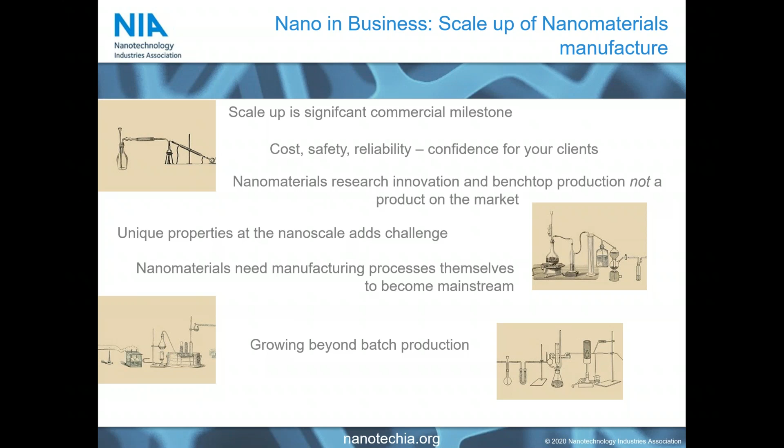And a lot of our members, where they're looking at early stage development, you're looking at small scale batch production, which is great for working with in the lab, but that is not how you're going to produce large quantities of it on a reliable, regular basis. So it's really about how you create the regular and reliable creation of larger scale amounts of your material. And this is really what our two speakers are going to speak about today.

I'm extremely pleased to have our first speaker as Promethean Particles, which is an SME based in the UK that, based on its own technology platform, has now become a successful scale-up manufacturer of materials, working with clients from all around the world in all different sectors. So they bring a very interesting perspective to how they see scale-up needs and how they address those needs.

We will then move to the absolute opposite of the spectrum and go to a large international company, which is Corning, which is, as you can see, almost 170 years old and a truly worldwide company. And its contribution to nanomaterials manufacture is based on its long history in glass and ceramics. So they've come into nanomaterials production from a very different perspective.

So what I'm going to do now is hand over to Selina, who will be our first presenter. So you will have to bear with me because I've got to find Selina out of our huge list of people that are taking part today. And she's S, so she's really far down the list. But Selina, perhaps you could introduce yourself and, oh, Sean's already done it. That's great. That's lovely. Thank you very much, Sean. You are much faster than me. So I will put myself on mute and Selina can introduce herself. And thank you very much, Selina, for taking part today.

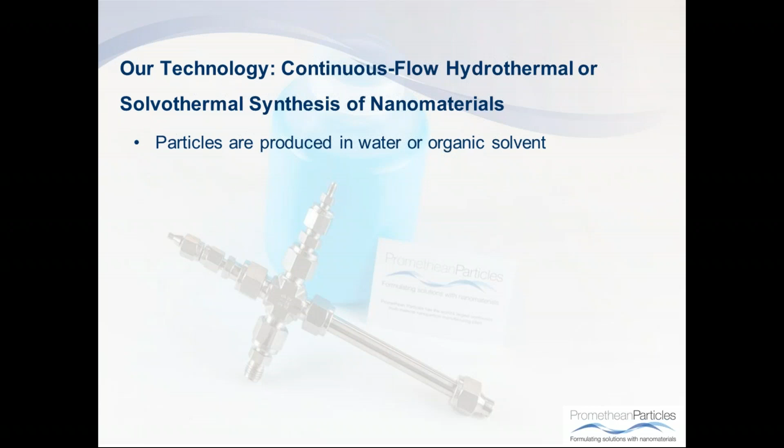So I won't go into too much detail about our technology today, but there's a nice video on our Promethean website which shows an animation of our process, or if you want to contact me afterwards to find out more, then please do so. But in a nutshell, we use a wet chemical process. We're using hydrothermal or solvothermal synthesis to produce our nanomaterials, but most importantly, it's a continuous flow process, not a batch process. So we see several benefits for our technology.

Because it's a wet chemical technique, what's happening there is we have our liquid raw materials pumped into our reactor systems. We then heat the liquid precursors under pressure, and that leads to particle nucleation. We're operating at temperatures up to 400 degrees Celsius and pressures up to 240 bar. But this is all done in a safe manner because we're using thick-walled stainless steel to manage everything.

So after we produce our particles, the product dispersion stream is cooled and depressurized, and our liquid product is collected at the end. And we have control over all the process parameters, such as the temperature, the system pressure, the types of raw materials, and the concentrations we're using, as well as the solvents or the flow rates. So there's a high degree of versatility and flexibility within the process.

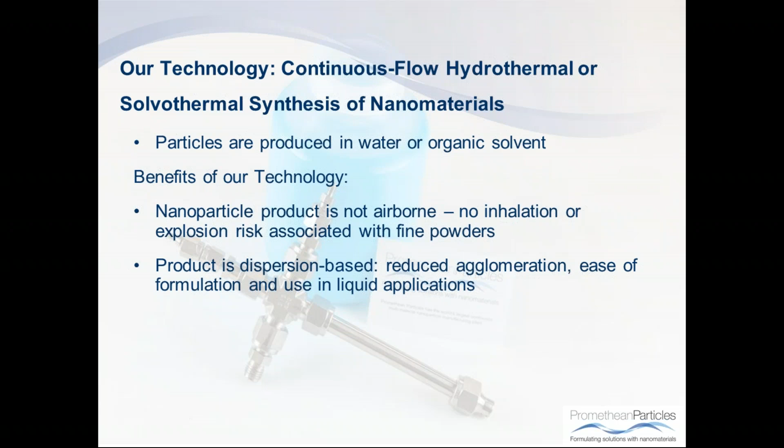But because it's a wet chemical process, there are several benefits, from health and safety benefits, that we're not handling dry powders, particularly pertinent when it comes to nanomaterials. But also from a technical point of view, using a solvent-based technique can have its benefits in terms of reducing agglomeration or protecting the particles against oxidation from the environment and that sort of thing.

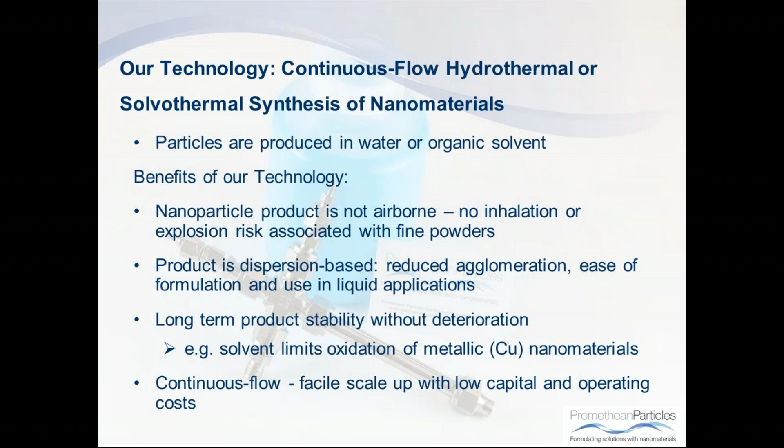And then because it's a continuous flow process, scale up is arguably simpler than scaling up a batch technique. Then from a cost point of view as well, the operating costs are relatively low compared to batch techniques. So at Promethean, we have bench scale reactors that we use mainly for rapid prototyping rather than production. These are producing a dry weight equivalent of a couple of grams per hour. So these systems are used to optimize the product for R&D purposes.

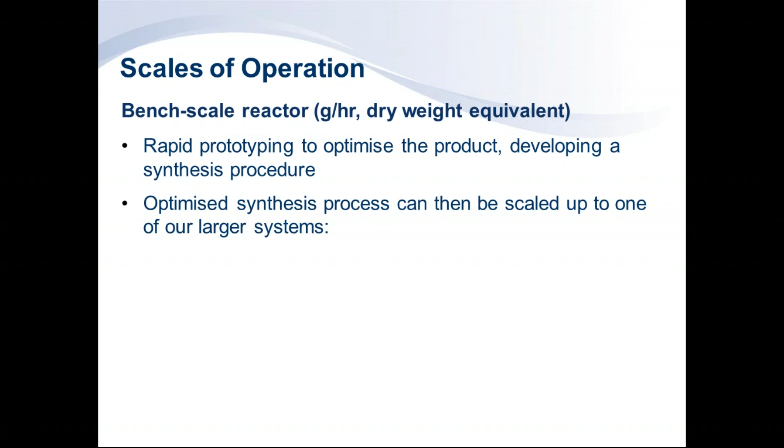And then once we've optimized that synthesis process to get the material that we want, we can then scale it up to one of our pilot scale systems. These have the capacity to produce anywhere from 1 to 10 tons per year, dry weight equivalent. And so these are used for production as well as to demonstrate scale up from bench scale. In the design of these reactor systems, there was a lot of modeling and CFD, computational fluid dynamics studies, that went into studying the fluid mixing within the system to make sure that the pipe diameters we were using were scaled up appropriately to maintain that homogeneous turbulent mixing in the system.

But like the bench scale systems, these pilot scale rigs are still fairly flexible in that we can use a range of operating temperatures, a range of pressures and flow rates. So we can use quite a few different processes and make a few different materials on these rigs. To date, we've probably upscaled about 50 different processes from bench to pilot, and we've seen very good reproducibility in terms of particle characteristics. So we're confident that any process we develop at the bench scale can be upscaled to pilot.

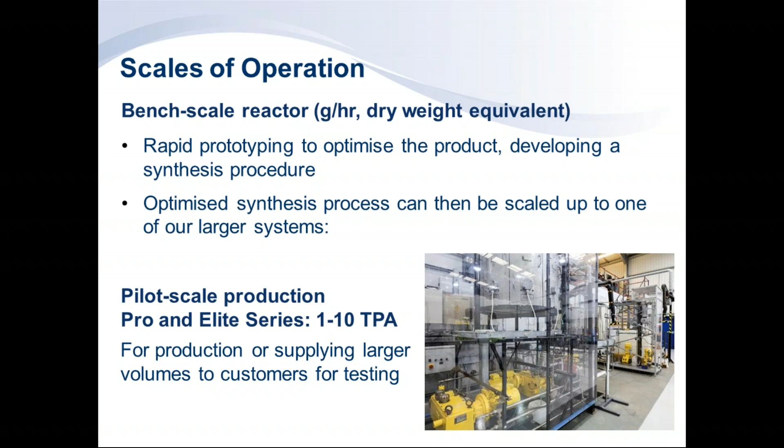And at pilot scale, that's sufficient to meet production demands for some markets, but in others, 10 tons per year isn't sufficient. So for that, we were very fortunate to be part of a European project where we got to design and build this system here, which we're very proud of. We call it our Infinity series, and it's the largest reactor system of its kind in the world. As part of the European project that we worked on called SHYMAN, we collaborated with chemists, chemical and process engineers all across Europe to design and build this system.

So again, there was a lot of modeling and CFD work that went into looking at the fluid mixing within the system and keeping it consistent with upscaling. In addition, with the Infinity series, heat recovery was built into the process to increase the efficiency of the process and also ensure that the sustainability aspect is maintained.

Even at this scale, there's some degree of flexibility in that we can again control the operating temperatures and pressures, so we can produce a lot of different materials using this system. And to date, we've upscaled probably around 7 different processes onto the Infinity series, and again, we've seen very good reproducibility even at this scale.

So we operate it on a campaign basis, producing one material, and then we have a clean down procedure, and then once that's in place, we produce another material. And the beauty with it being a continuous flow process is that if we need to produce a larger volume of a certain material, we can just run it for longer.

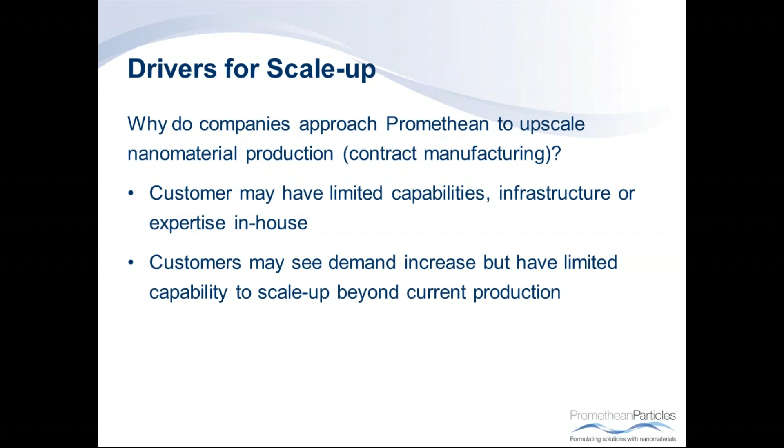And then in some other cases, it comes down to health and safety, actually. So some of our customers may have developed a material using a process that can be exothermic or leads to a pressure buildup. And that can be particularly dangerous, especially if they're using a batch vessel, where the pressure buildup essentially means that they're handling an explosive device. So then that's just not feasible to scale up. So then they're seeking a continuous flow route instead, and that's where our technology can really provide some added value there.

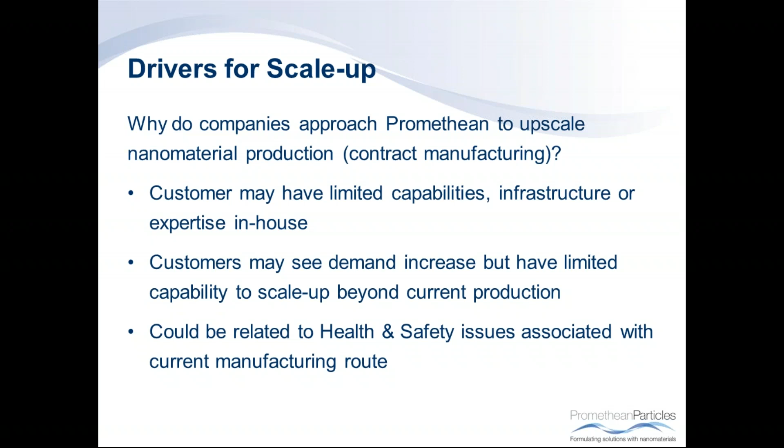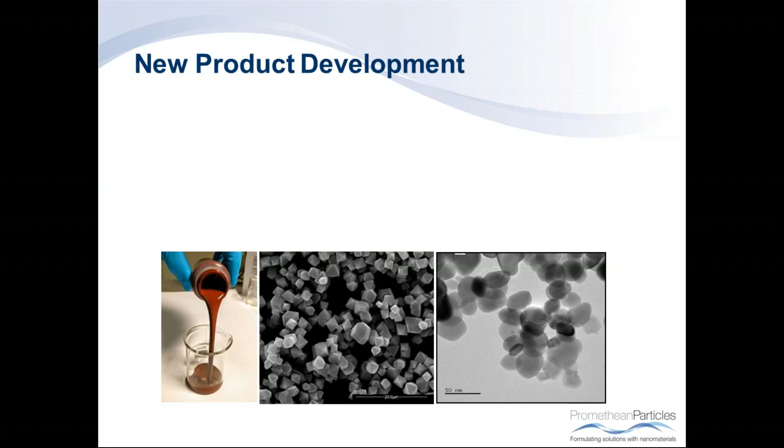So as I mentioned, as well as conducting feasibility studies and scale-up projects for our customers, we have our own product development at Promethean. So I'll talk a little bit about that. So the images here just show some of the products that we've developed and now sell on our web store. So we've got copper on the left. In the middle is a metal organic framework structure, which I'll talk more about a little bit later on. And then on the right there is an iron oxide.

So as we're thinking about new products and developing them, even at the conceptual stage, we have to think about the bigger picture questions. So thinking about the market demand, because as cool as blue sky research can be, as a business, we ultimately have to address a market demand, and our products have to meet a need. So it's identifying that need. And then we also think about our technology. What's the USP? Is it offering something different to what's already on the market? Can we make it cheaper than what's already out there? Can we make a better product? Or is it simply that the supply currently available just doesn't meet the demand?

So those are the drivers for why we develop our own products and go down the upscaling route, because there are plenty of suppliers out there making titanium dioxide for pigments, so there's no point us trying to reinvent the wheel, so to speak.

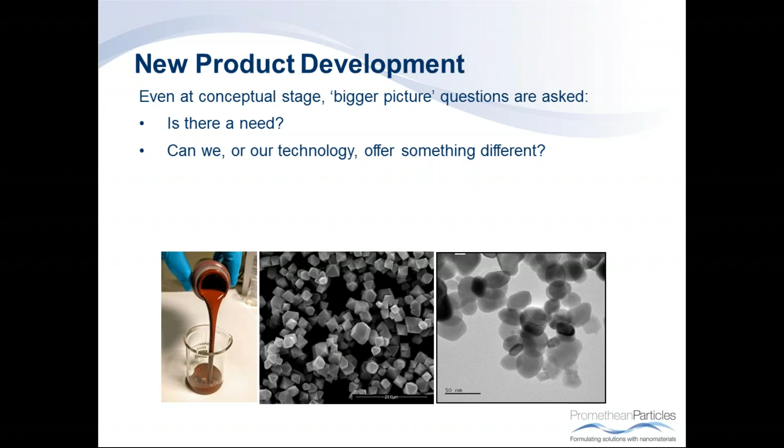Then we also, from the conceptual stage, think about any obvious barriers to scale up. So with some materials, there are very niche, specific raw precursors that are needed to make that product. And it may be difficult to source or expensive to buy in. And that can be a real barrier to upscaling.

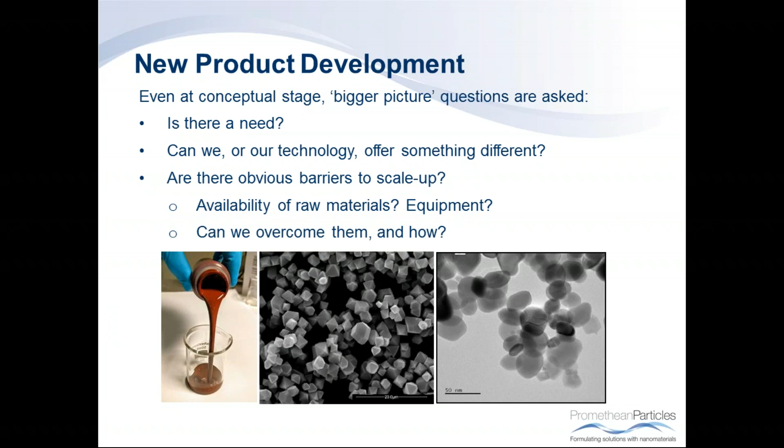And then also if there's any specific equipment that we don't have that's needed for making that material, processing it or purifying it, then that's something we need to consider even from the early stages. But ultimately, if we identify a strong need and we know that we can offer something different to what's on the market there and disrupt the market, then we ask ourselves, how can we overcome these barriers? And that's part of the innovative streak within Promethean.

So with the products that we've prototyped at the lab scale, and then we're thinking about upscaling to the pilot scale, there are several technical and commercial considerations that we have to factor in. And I've put the technical and commercial considerations together because often they go hand in hand, even sometimes if you don't realize it. But the important thing is that all these factors need to be reviewed regularly during the upscaling process because things can change both internally and externally.

So for us, when we've prototyped at the lab scale, we need to define a specification. So what are the key material characteristics that will be a marker for success? It's not always particle size. It may be a bit of a red herring there, and it may be that your purity or your size distribution is the key thing there.

So it's understanding where the goalposts are and what the target is, because ultimately when you've upscaled the material, yes, certain parameters can change, but are the key parameters still the same? Because that's how we can identify success. And then that will feed into the quality control procedure for that material, not just the QC for the end product, but also QC for incoming raw materials and inline QC as we're producing the material in a continuous manner.

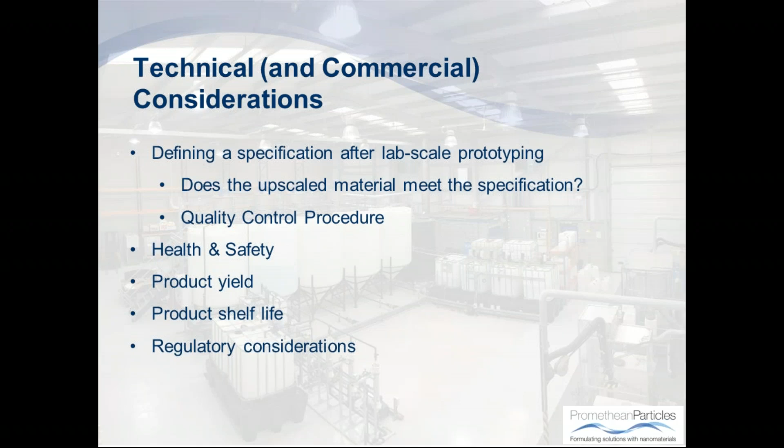For us, because we're contract manufacturing materials for our customers, after production, we need to think about shipping. So if it's hazardous goods, then there are certain regulatory things we need to think about, like packaging and also all the paperwork that the couriers need.

And then, of course, money comes into it. So we need to think about the cost analysis and the scale of operation. Because we're using a continuous flow process, economies of scale plays a very, very important role. Essentially, the more we make, the cheaper it is per unit. So the cost per kilogram of material decreases with the increasing scale. So we need to identify this scale of operation where it becomes cost viable, and also how that balances with demand.

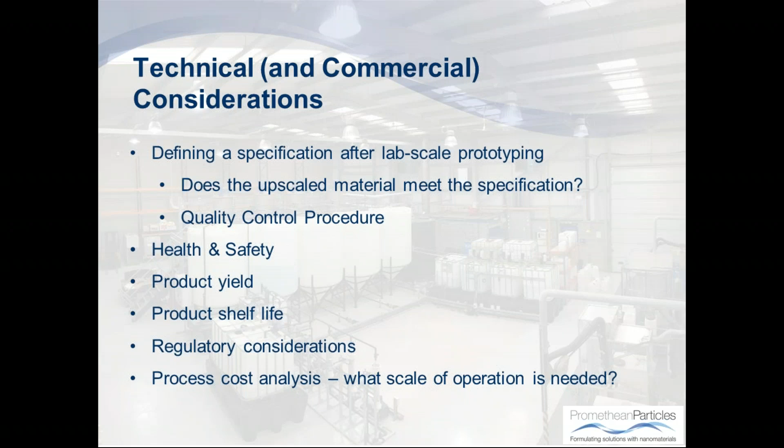So I've got a couple of slides here with an example of one of the products we've developed in the lab and then upscaled, so the metal organic frameworks. So MOFs are a group of compounds that are highly porous and have a very high specific surface area. So they're useful for hydrogen storage, carbon capture, as well as catalysis and chemical separation as well. So this material here is called ZIF-8, and we identified a demand and a unique selling point where our technology could offer something that wasn't available on the market, in that we could actually reach greater scales of production than currently being offered.

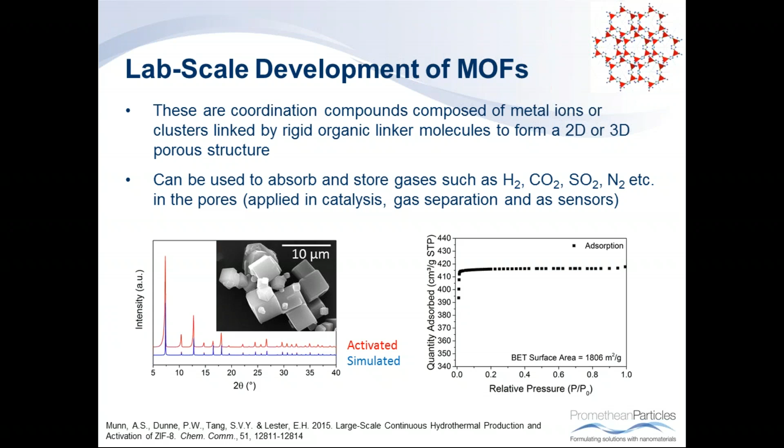So we prototyped the process at the lab, developed a procedure for manufacturing this material at a small scale, and we got the crystal structure that we needed and the surface area that was in line with what was reported in the literature. So then we started looking at scaling this up to pilot scale. So at this level, we were producing up to about 1 kilogram per hour dry weight equivalent. And with this material, the crystal structure and the surface area are the two key characteristics. So that starts to form our spec.

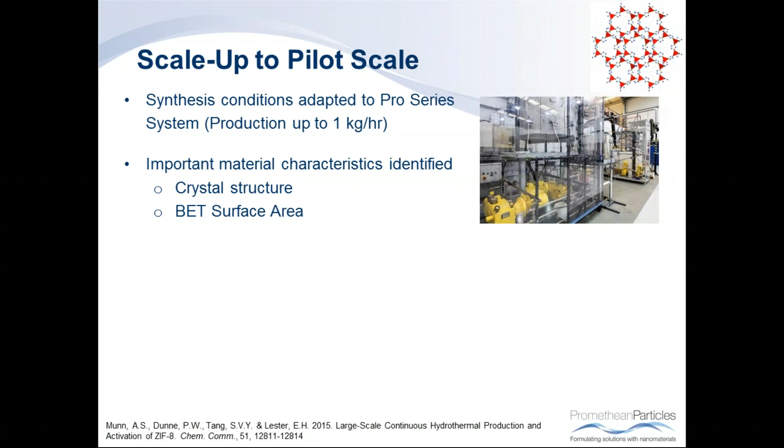As we produced it on the pilot system, the crystal structure was spot on, the surface area was in the right ballpark, but the particle size and the morphology was slightly different. So this is what I mean about understanding your spec, because different isn't necessarily bad. In this case, it doesn't affect the end performance because the surface area is still in the range it needs to be. So in this case, we can consider this scale-up process a success.

As importantly, the economics of the system is sufficient in that the costs of producing at this scale are low enough that we can offer this product on the market for sale at 1/10 of the price of other suppliers currently in the market. So there's this balance between the technical priorities and commercial priorities there.

And then even with getting this product on the market and achieving scale-up, we're still looking at improving the product more. So since this publication, we've been able to increase the BET surface area up to 2,000 meters squared per gram, and also increase the yield to make it even more cost effective.

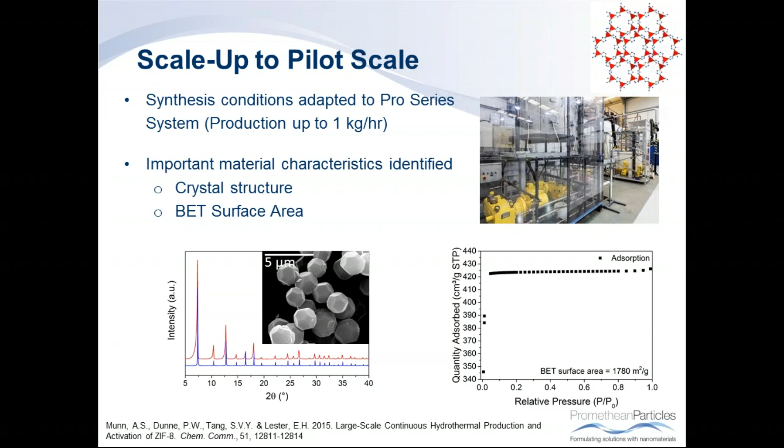So finally, to summarize and conclude, using a continuous flow process to address scale-up can have several benefits. Because we take a just-in-time manufacturing approach, we're producing material and we can have a QC protocol as the material is coming out of the system. So we can very quickly identify if something is not quite right, and then rectify it, which means that we're minimizing the amount of waste. We're not having to discard an entire 1,000-litre batch because something's gone wrong. We can react quite quickly, and that means that the process is an efficient and sustainable one.

And because we can control our process parameters, we can fine-tune conditions and optimize at scale. We're not having to go back to the bench scale and re-optimize and then scale up. We can do it at the pilot scale as we go along. And then the multi-material flexibility means that we can scale up lots of materials using the same equipment, which means that we're minimizing the capital expenditure. We're not having to have separate reactor systems for each material.

And then from a health and safety point of view, compared to batch systems, our continuous flow reactor systems aren't closed vessels. We continually have raw materials coming in, product going out, so it's easier to maintain pressure, not having unexpected pressure buildup or any exothermic reactions, so regulation of the process is a lot easier. And finally, because of the economies of scale, scaling a continuous flow process means that the operating costs or the cost per unit comes right down with increasing scale.

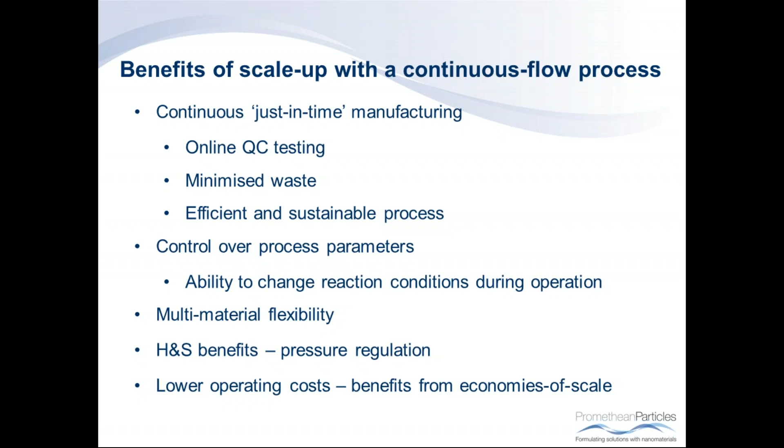And it's very interesting when you said that often the scaled-up particle may actually be slightly different than the original particles developed. And of course, when you look at REACH dossiers, that's a very important factor to take into consideration. So you have to ask the question as to what your dossier is going to contain to ECHA, whether it's the original material you've produced or the scaled-up version of that same material.

So, as you can see, I'm an application engineer working at Corning. And it is my pleasure today to deliver my quick presentation on the Corning Advanced Flow Reactor as part of the Nano in Business Group. My role is to be the technical support for the customers.

Let me guide you quickly through our agenda. After a few words regarding Corning itself and presenting the AFR business, I will show you an example using the equipment and displaying excellent reproducibility on bimetallic nanoparticles. Then I will discuss another example of quantum dot synthesis, showing scalability, and finish with another application on photochemistry before concluding.

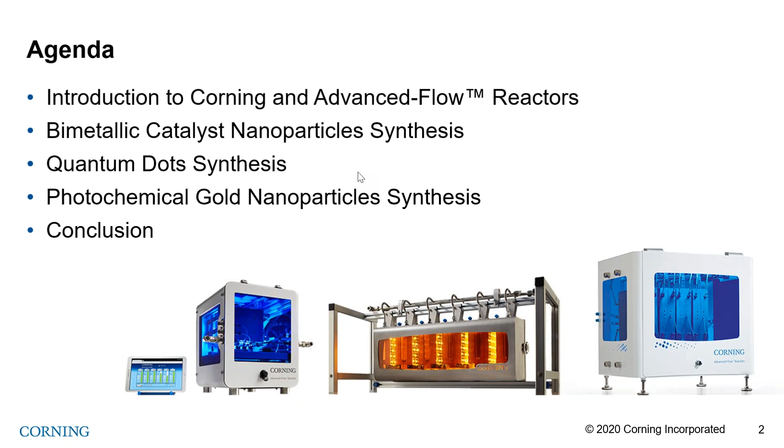So, Corning is an old and well-established world-leading company specialized in glass and ceramics. Its core philosophy is based on innovation and research to change and improve the life of people. It is a global company present worldwide, striving to bring technology everywhere.

Corning is used to produce mass market products which improve people's lives. The core innovation has been present throughout Corning history and is more true now than ever. Corning has been upscaling everything during its whole life. Among the things Corning has developed for the market, one can notice the Pyrex glass, television picture tube, optical fiber, and the Corning Gorilla Glass, which equips millions of mobile phones worldwide.

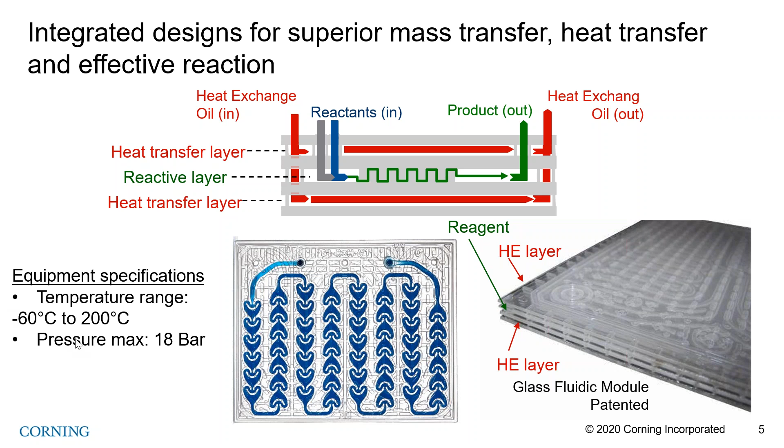I'll carry on. Among the glass innovations, AFR is a Corning business which uses an integrated glass design to perform flow chemistry. In this device, reagents go through the plates, which we call fluidic modules, in which a controlled chemical reaction can occur smoothly. This unique technology combines a sandwich structure in which the reactive pathway is stuck in between two heat exchange layers, making sure the heat transfer is excellent. As can be seen now, the three layers are very, very close, and the specifications are pretty large for our reactors.

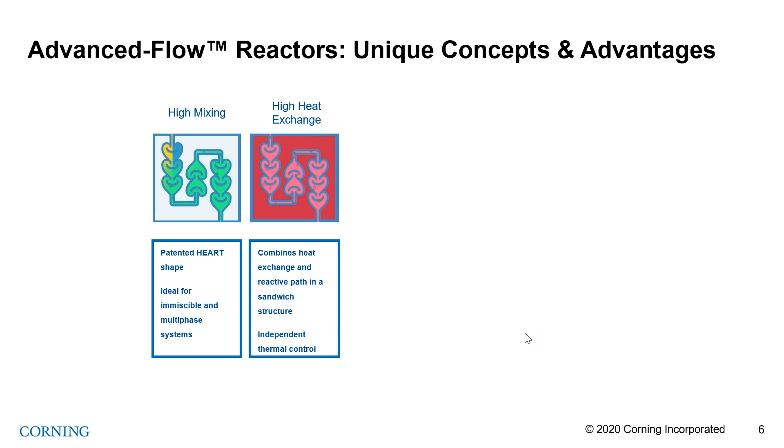The slide shown here describes the specificity of the AFR reactors. Firstly, the reactive pathway incorporates a number of heart-shaped exchangers in a row, which ensures top quality mixing throughout the reaction pathway. This is especially true in the case of non-miscible phases, such as liquid-liquid or liquid-gas. Then, as shown in the previous slide, the heat exchange surface is very high and ensures an excellent heat exchange property for our reactor.

Making the most of the experience from Corning, our reactors are highly chemically compatible, as we use either glass or top-grade silicon carbide material to make them. This ensures total chemical compatibility for all types of chemistry in application. Another key property is that all the AFR reactors have been designed to seamlessly scale up. This unique property was engineered from the start to ensure a consistent mass transfer as well as heat exchange coefficient across all of the AFR portfolio. This means a reactor will behave the same at any scale. This property is an excellent feature, helping customers to go from the lab to the production scale.

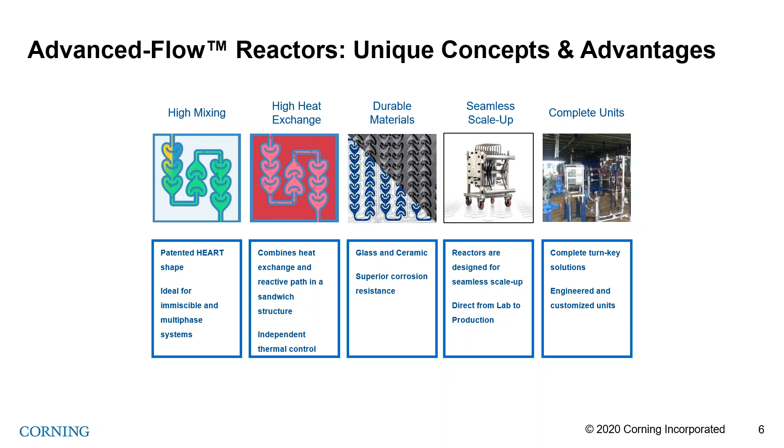And last but not least, Corning has acquired experience over the years in selecting the best devices around the reactor, and our engineering team can design custom-made solutions and offer turnkey features to our customers.

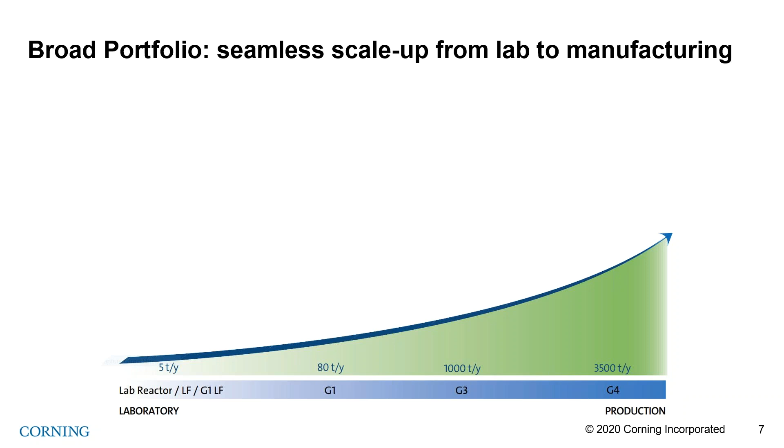So, let me introduce you to the Corning AFR portfolio. It covers a wide range of metal-free and highly modular reactors from laboratory to industrial scale. This includes the Lab Reactor, which has been designed for people starting in flow chemistry, and the photochemical version, the Lab Photoreactor. We are adding as well the Low Flow Reactor, which is more modular, and all these products deliver flow chemistry at a range of a few milliliters per minute.

When one scales up, Corning offers the G1 reactor at the pilot plant scale, which exists in different versions, from glass to silicon carbide, with the possibility of a photochemical option by adding an optional LED panel module. Upon reaching the industrial scale, there is the G3, which can process up to 1,000 tons of product. It is also available as a photochemical reactor. Last but not least, Corning's largest reactor to date is the G4, which is made of silicon carbide and can deliver throughput in the range of a few thousand tons of processed product per year.

Of course, today we are going to discuss applications of nanoparticle synthesis within the reactors I've shown previously. The first example will focus on reproducibility. AFR collaborates with external companies. One of these external research institutes investigated the repeatability of processes. This institute started a project aiming at speeding the process of going from the laboratory up to the real industrial production scale. More specifically, as a benchmark product, they selected a fuel cell catalyst synthesized with two metals.

The synthesis was to be made from milligram scale up to kilogram scale. The initial work people had done was performed in batch, but unfortunately, the scale-up of the methods proved unsuccessful.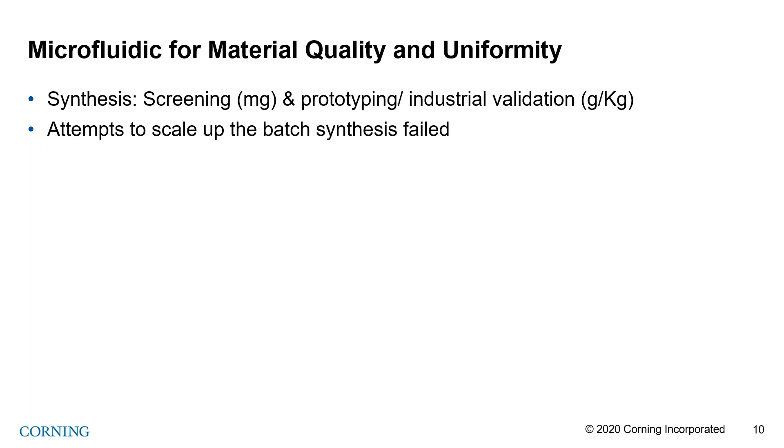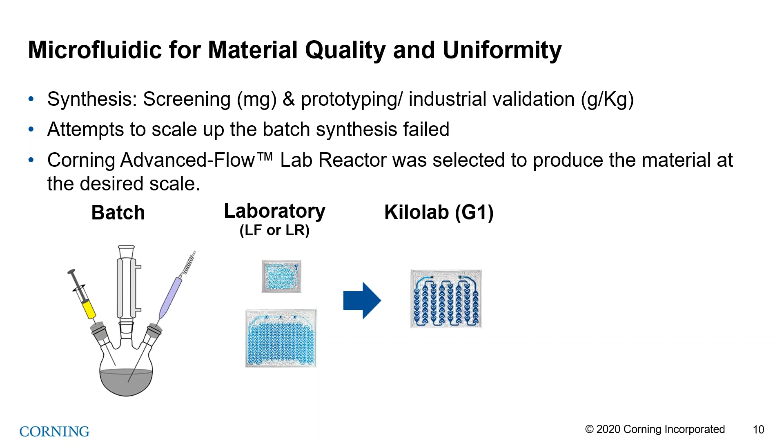It was highly user-dependent. Facing this issue, the researcher turned toward flow chemistry to address the challenge. Indeed, if the reaction worked out, scaling it up would be easily helped by the fact that the Corning reactor portfolio is especially designed for scale-up.

The nanoparticles synthesized here were made of platinum and nickel. The first good news is the process could be transferred smoothly from batch to flow chemistry. The first aspect people wanted to check was the quality of the product over time, so the scientists performed the synthesis over an extended period of time and collected samples to perform more in-depth analysis.

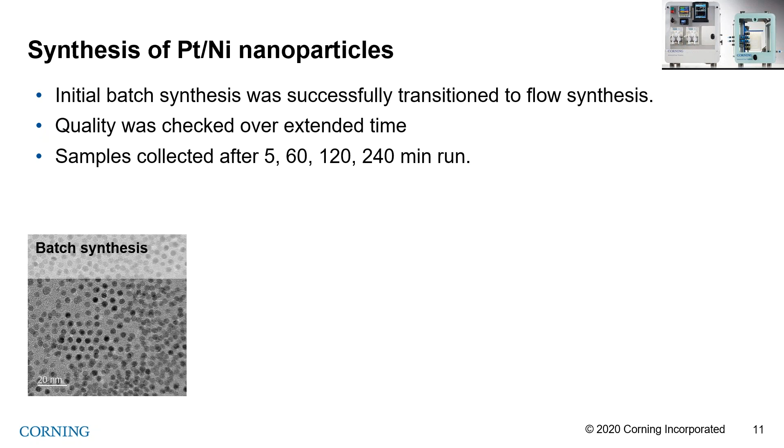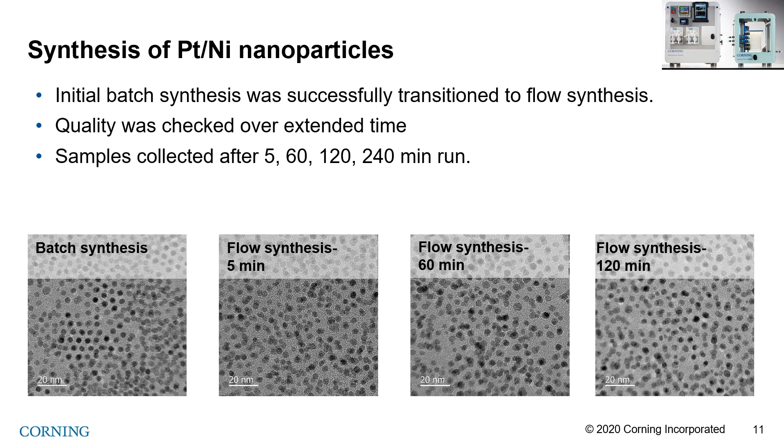As you can see here on these pictures from the analysis, nanoparticle shape and size obtained in batch and flow was very similar. Interestingly, one can notice that the results are essentially identical even after hours of continuous production. This is indeed the case, as the reactor has reached its steady state level and will deliver a reliable product as long as it is fed with starting material.

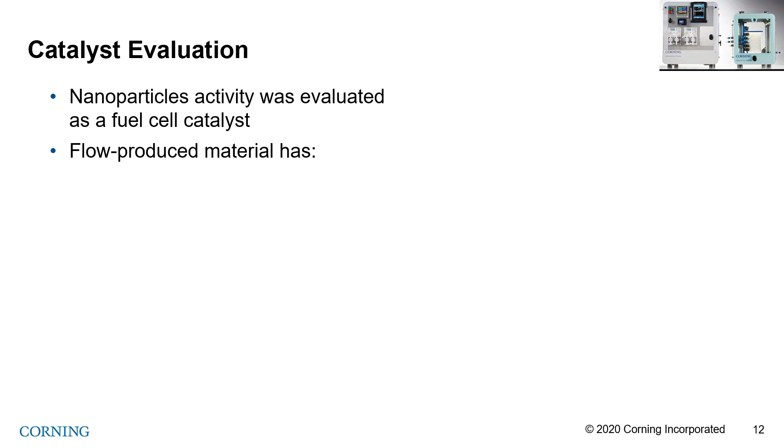After the synthesis, the best way to actually test the nanoparticle is to use them. The nanoparticle catalytical activity was evaluated and tested as a fuel cell catalyst. For the test, a commercially available nanoparticle was set as a reference.

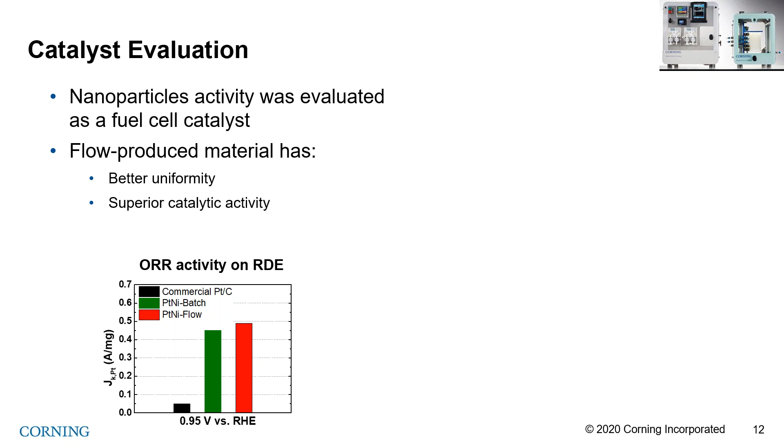As can be seen in the illustration below, the catalytical activity of the nanoparticle produced in flow, shown in red, is slightly higher than the one produced in batch. Additionally, they reach higher uniformity when compared to batch.

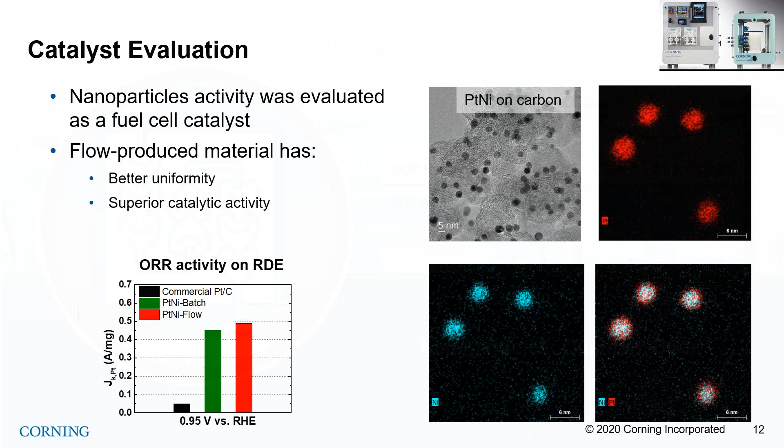Now I will talk about the quantum dot synthesis. This work was actually performed by Professor Jean-Christophe Monbaliu at Liège University in Belgium.

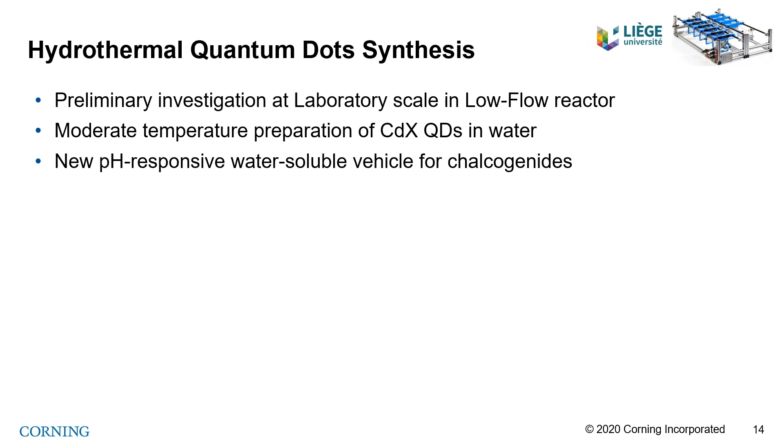He and his team decided to work with a low-flow reactor. They worked with a synthesis involving cadmium salt reagent and performed the reaction in water. It's known that this solvent can be challenging for this type of synthesis, so they modified an existing procedure to adapt it to perform well using flow chemistry.

Indeed, the residence time can be modified pretty easily by adding or removing fluidic modules on the reactor. This on-demand production is a new way to easily control the synthesis and make the most of the equipment to deliver high-value products. To summarize, quantum dots were synthesized in ecologically friendly solvents in a reliable way, controlling the residence time to produce on-demand quantum dots at laboratory scale.

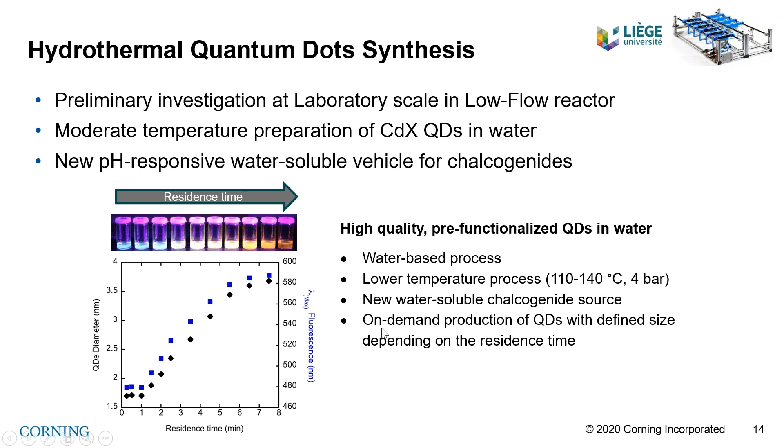Moving on from there, the work was repeated in a G1 silicon carbide reactor. The transposition worked out well.

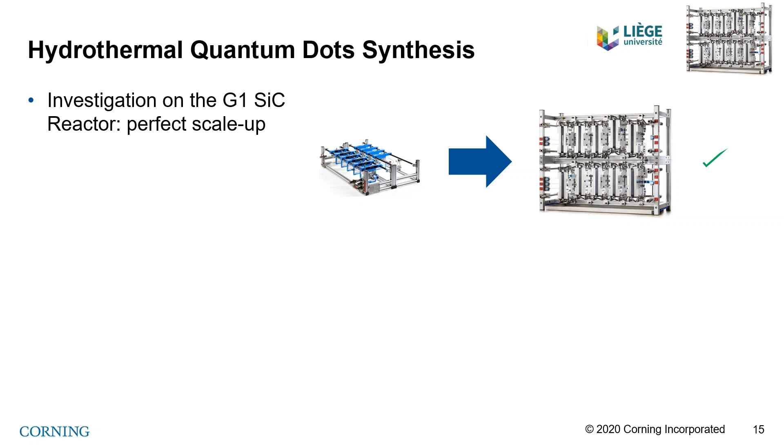Using the higher scale, work was performed to look into the pH effect. As previously mentioned, when one increases the residence time, the size of the nanoparticle increases. But using this setup, they could see as well that increasing the pH increases the size of the quantum dots. This was possible because of the strong chemically compatible nature of the silicon carbide used.

So this example shows you that it is possible to finally make quantum dots using flow reactors. So far, we've seen nanoparticles made of platinum, nickel, and cadmium, but there is more than that.

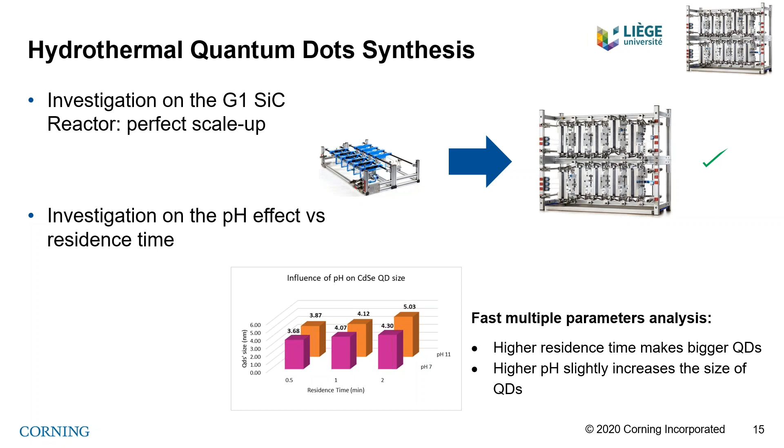Let me introduce you to nanoparticles made of the most precious metal - I am, of course, referring to gold. In this case, the nanoparticles are synthesized in flow with photochemistry, an aspect I've briefly mentioned earlier.

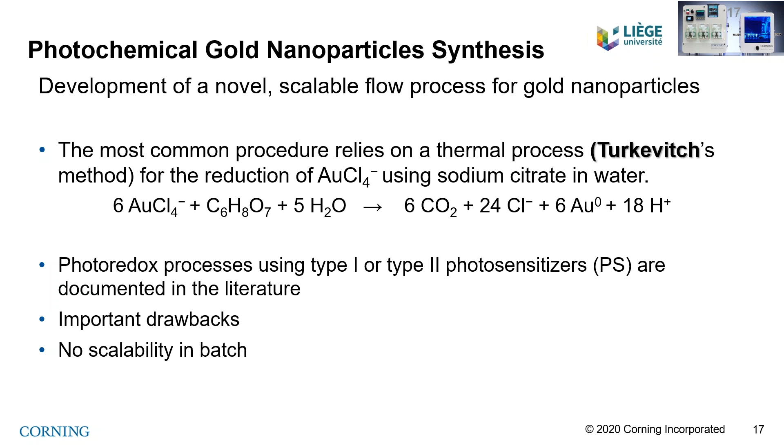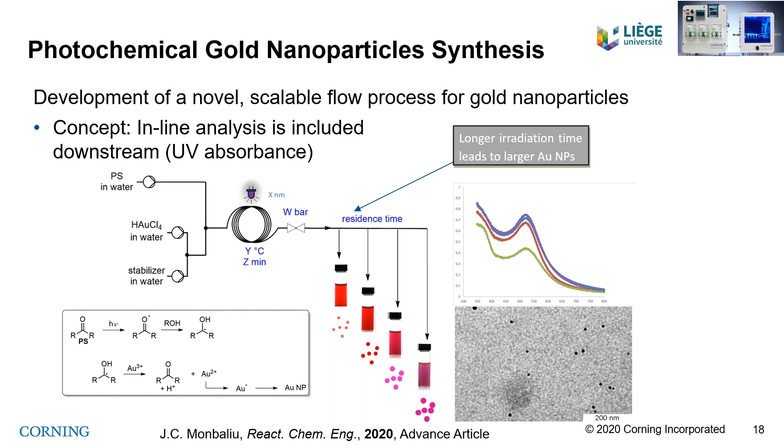Based on this design, a very fast screening of conditions can occur. When it comes to the result, the good news is that it works very well. Here again, longer residence times mean larger nanoparticles. Here, as well, UV spectra on the right-hand side of the picture display good quality of product. And while performing this work, a lot of interesting knowledge was acquired. On the bottom here, one can see the postulated mechanism.

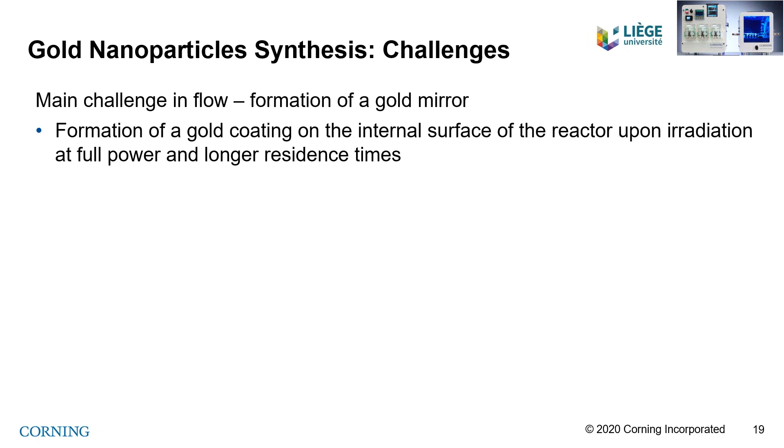Addition of stabilizer as well was performed to improve the situation, but it only improved the nanoparticle stability once they were formed. So last but not least, varying the conditions helped to avoid the issue. This way was successful while maintaining good properties of the product.

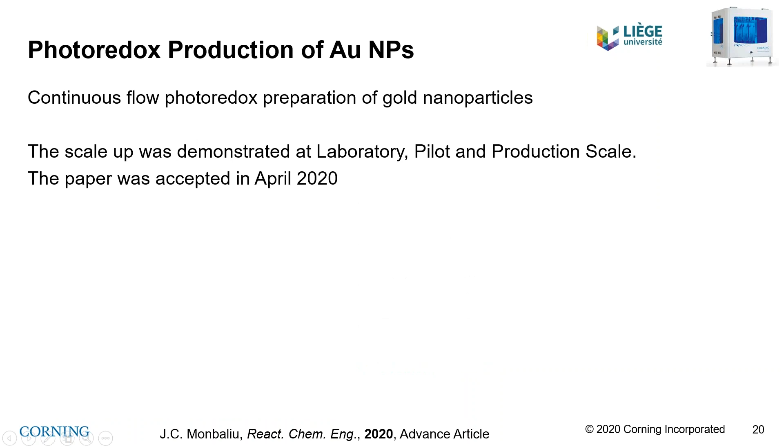After the reaction was made at laboratory scale, trials in pilot plant were done in the G1 photoreactor to validate the scalability, and after this quick test, actual testing on the G3 photoreactor was carried out to prove the scalability at a real industrial level. This work has just been published. You can see underneath the link to the paper. I would encourage people to have a look at the scale-up strategy where everything is displayed in more detail.

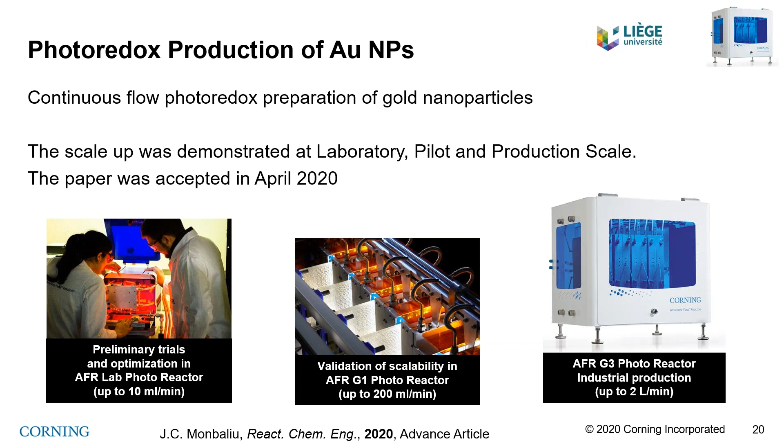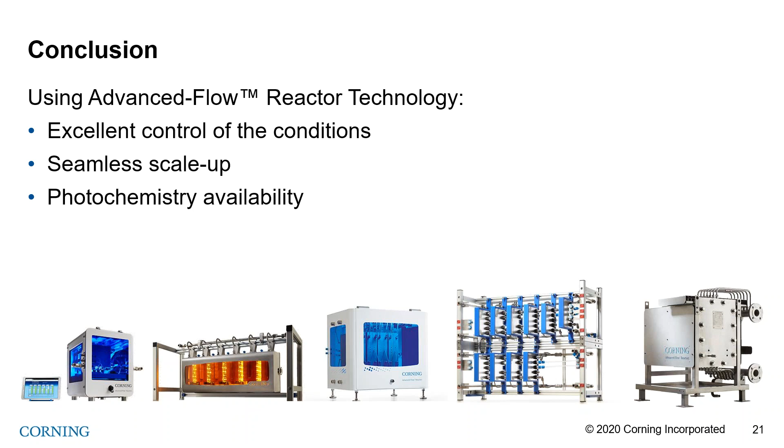So I would conclude here and summarize that AFR technology is a market-disrupting tool which allows the production of highly controlled and repeatable nanomaterial products. Advanced flow reactor offers a wide range of products and reactors with seamless scalability, which is the core property for all of our products. Once optimized at laboratory scale, a product can be moved to industrial scale in a very timely fashion. And last but not least, our product offers photochemistry in a controlled way at all scales if required.